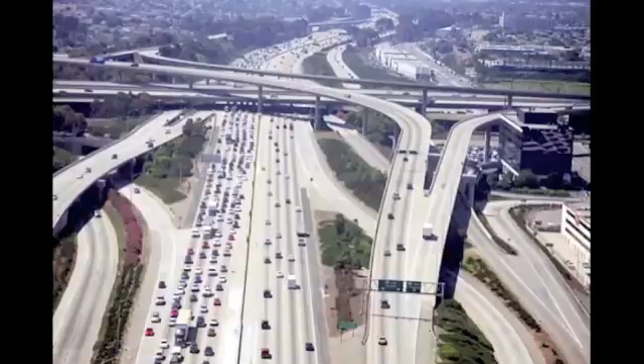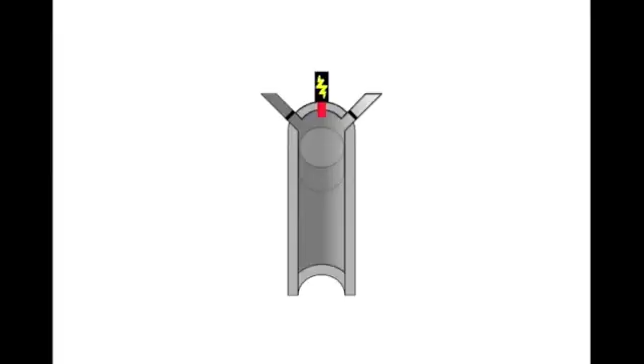At the heart of an internal combustion engine lies the cylinder, which is essentially a hollow tube. We will begin by briefly describing each piece of the cylinder, followed by an explanation of how all the pieces work together. Inside of the cylinder is a piston, which is free to move down or up.

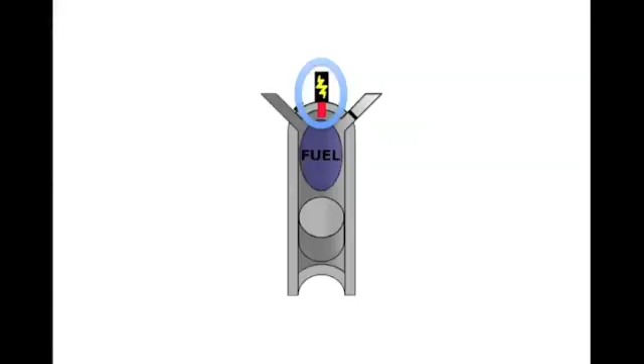At the top of the cylinder, there are two valves. The first is the fuel valve. When the fuel valve is open, the fuel is able to flow into the cylinder. The next piece of the cylinder is the spark plug. When the fuel is prepared, the spark plug emits a spark, igniting the fuel.

The final piece of the cylinder is the exhaust valve. Once the fuel has been burnt, the exhaust valve opens, which allows the exhaust to be pushed out of the cylinder.

The cylinder creates energy using a repeating pattern of 4 strokes. In the first stroke, known as the intake stroke, the fuel valve opens. The piston moves down, reducing the air pressure within the cylinder. Atmospheric pressure from outside forces a mixture of fuel and air into the cylinder.

In the second stroke, known as the compression stroke, both the fuel valve and exhaust valve are closed. The piston moves up, compressing the mixture of fuel and air so that it burns more efficiently.

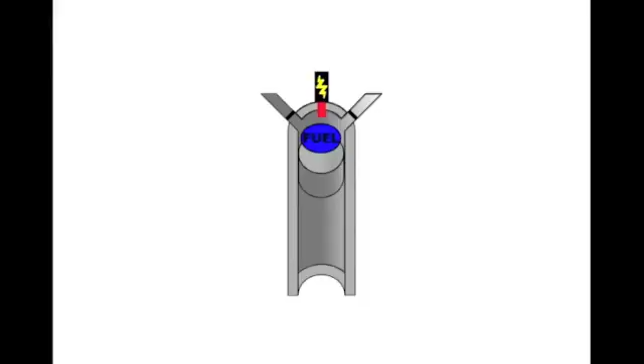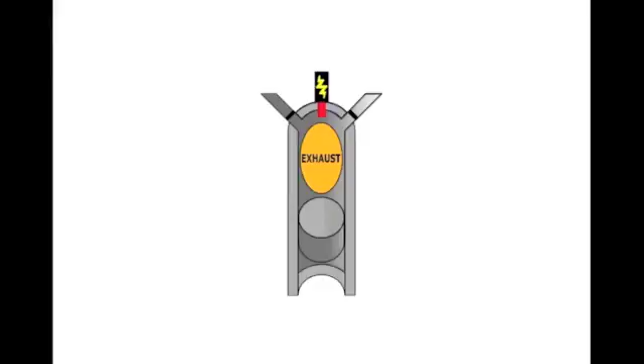In the third stroke, the spark plug emits a spark. This ignites the fuel, which expands as it burns, forcing the piston back down. This stroke is known as the power stroke because it creates the power which spins the wheels of the car, as well as the power to move the piston through the other 3 strokes.

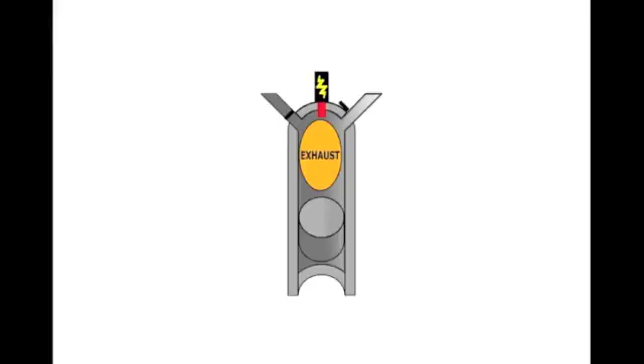In the fourth stroke, the exhaust valve opens. The piston moves up, pushing the exhaust out of the cylinder.

The process then repeats.